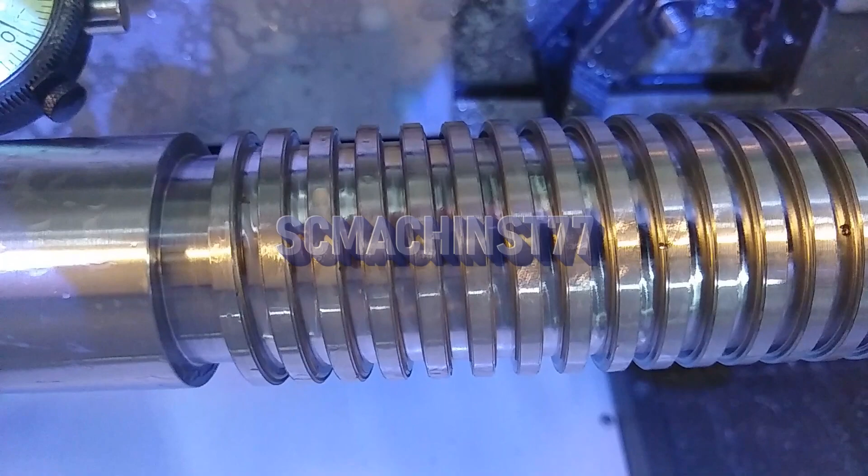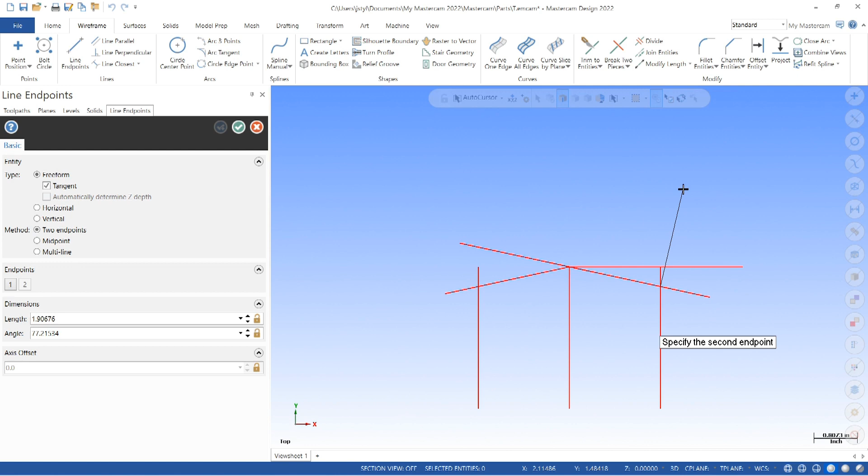Today I wanted to do a quick little video on using Mastercam to design a solid part and then creating an STL or a 3D print file and making a part that way. Just kind of going through it real quick. I'm not doing any explanations on what I'm doing, so if you want me to do some videos on creating geometry and stuff like that, we can do that later on down the road.

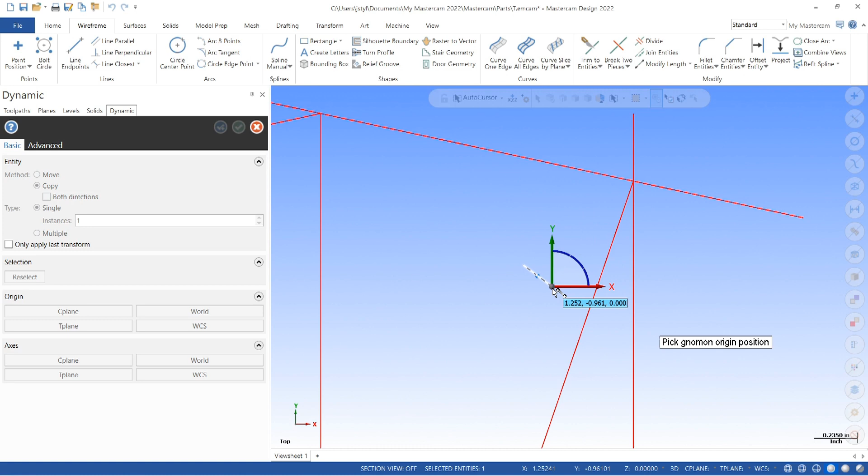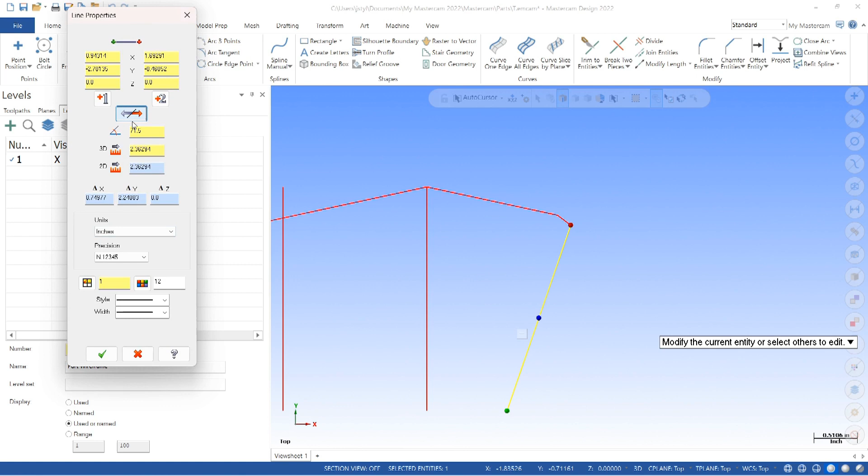But what I'm doing is I'm creating just a little piece that'll hold an indicator, so I can double check and see how square this build plate is on my 3D printer that I recently bought. I bought an Anycubic Kobra Max, 400 by 400 millimeter build plate, and it went together pretty good. I've done a few test prints. They turned out pretty good.

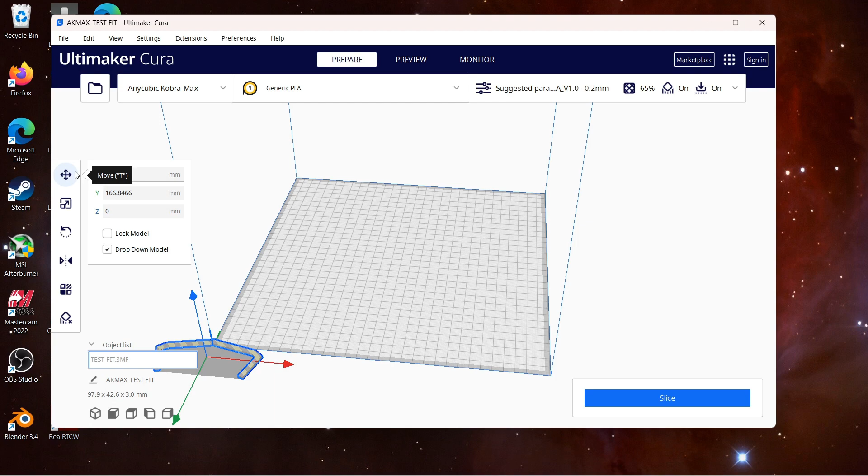So what I'm doing now is I'm creating just a test piece so that I can quickly print it out and then see how it fits over that fan shroud. I'm going to use Cura to slice it out. And here I'm printing my first little test piece.

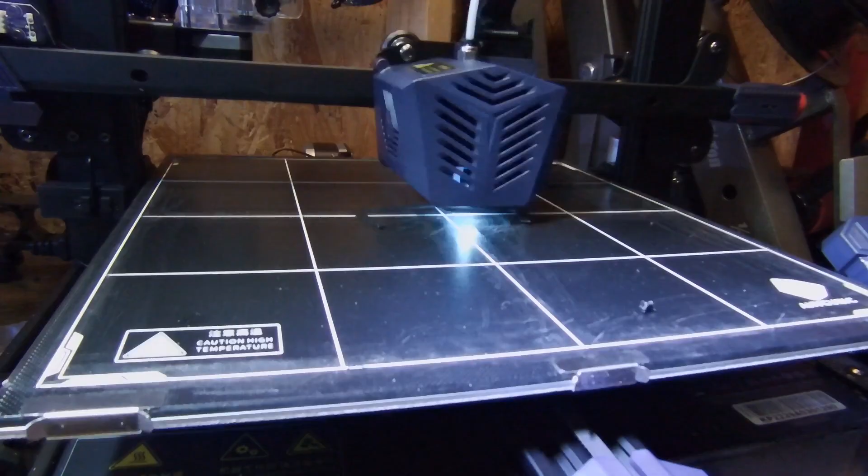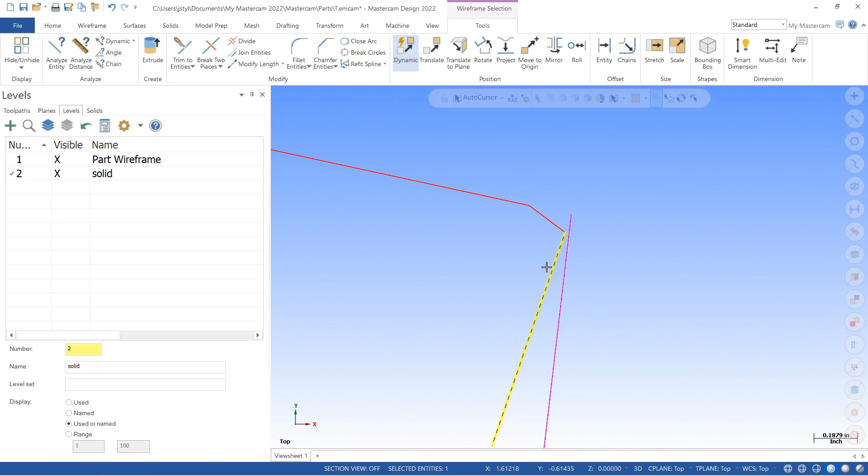It doesn't fit because when I drew it up, I drew the angle less than 90 degrees. It's supposed to be 96, and I knew it was 6 degrees off of that top flat there, but I did it less than 90 instead of 96 degrees. That's why I always do test prints when I'm checking fits on things first.

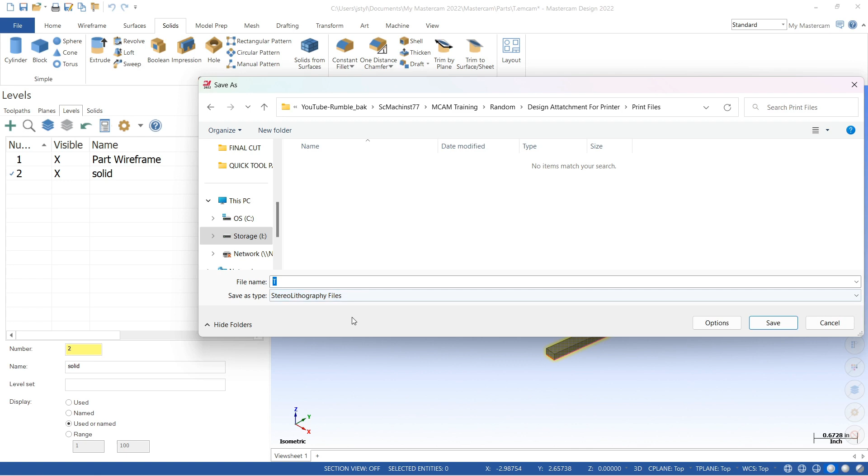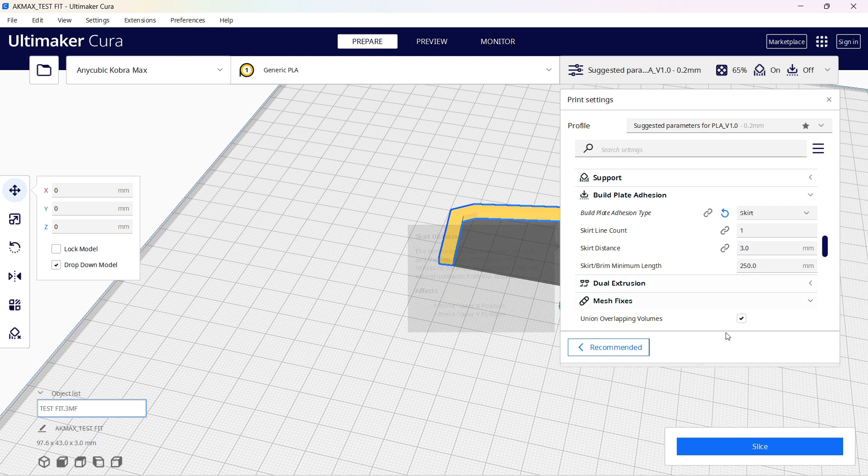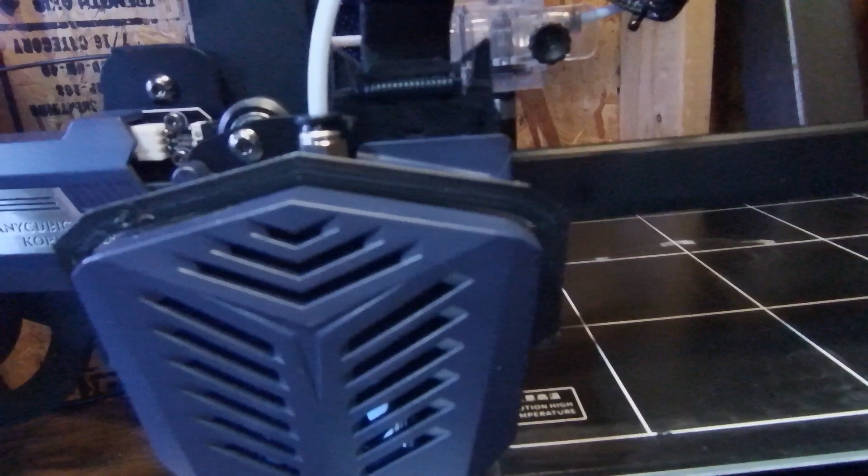Now I've got that done, I'm going to print another little test piece and see how it fits. This time it fits pretty good.

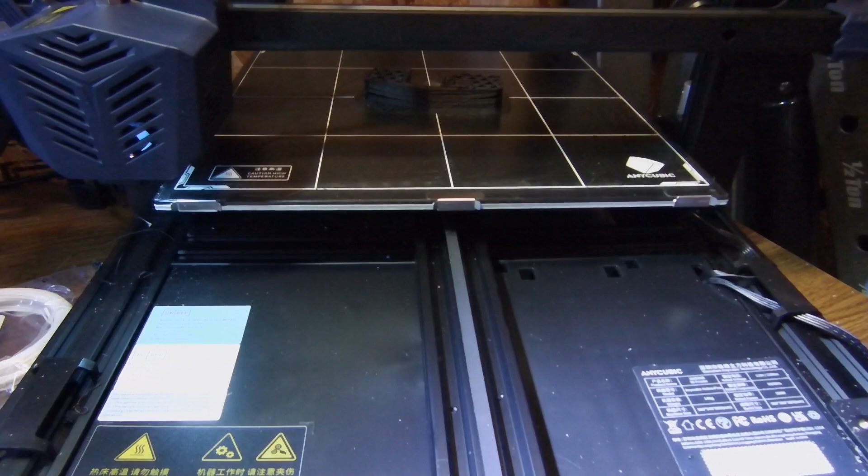Here I'm printing. I didn't show it where I had finished modeling it out, but I'm printing my first run at it. What I didn't realize is that I didn't pay attention to the spool I had on there, and it was ABS. I had done a test print with ABS when I first got this thing. I was thinking about doing one and put it on there. And trying to print ABS with PLA settings doesn't work out too well, as you'll see. Didn't print very well at all.

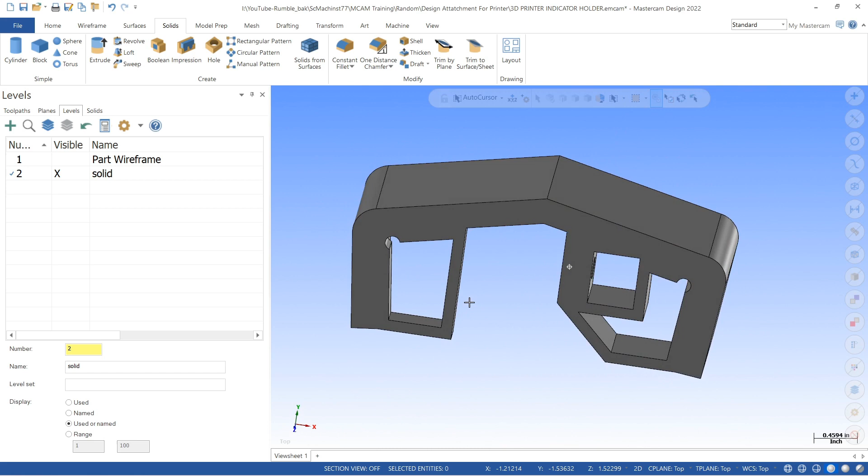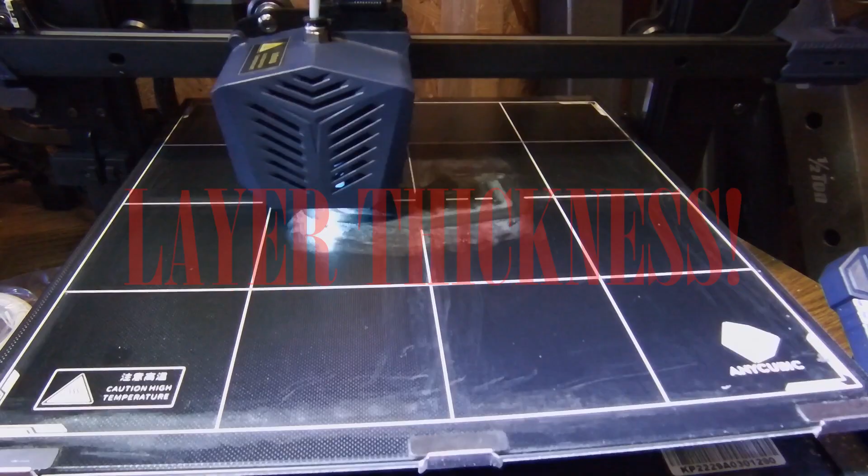So here's what I ended up finally with. I went in and reduced some of the volume of it so it wouldn't take quite as long to print. I think this ended up taking 2 hours, 2.5 hours, something like that. I could have bumped up the steps and been at like 0.3, but I went ahead and did it at 0.2.

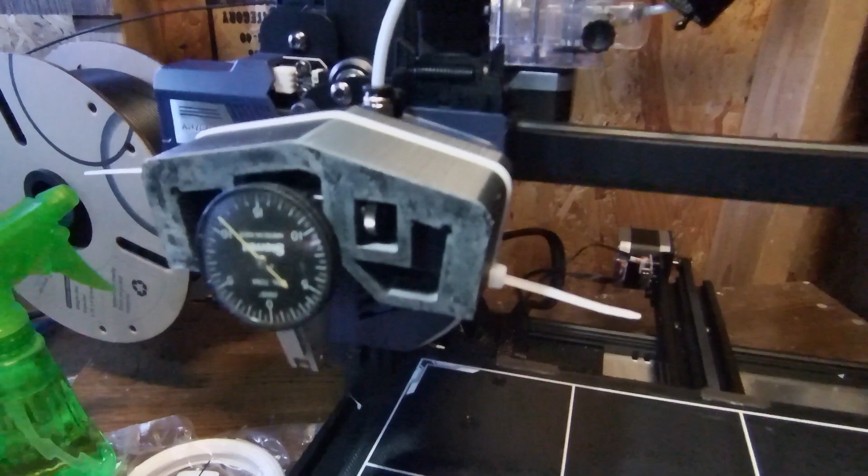Alright, and here's the indicator mounted on it, and it fit a little looser than what I wanted, so I put zip ties on it. And basically what I'm going to do, you'll see in the next couple clips, is I'm going to indicate in each direction and see how out of square this whole frame is. It wasn't too bad.

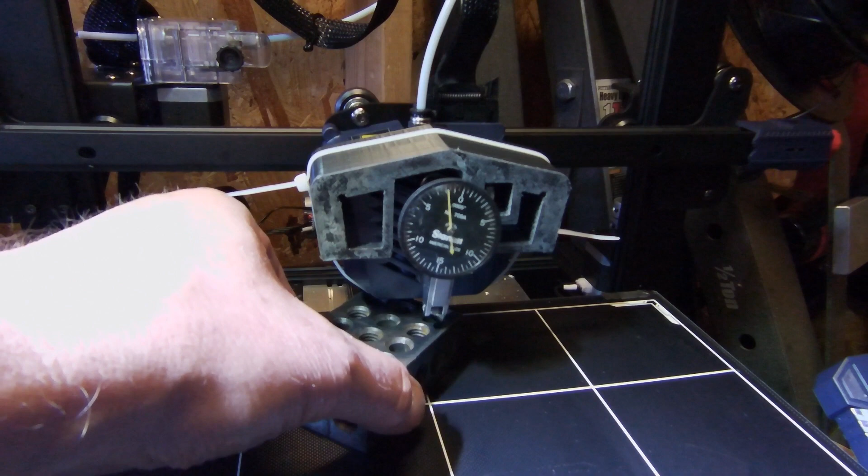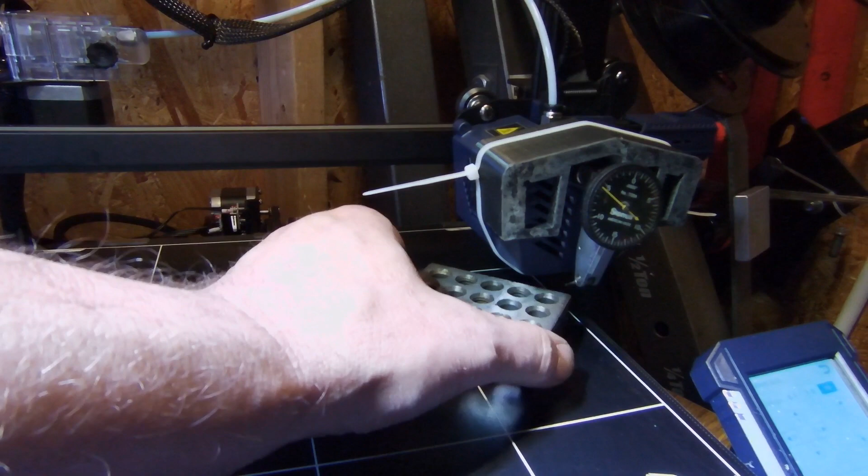I've got 6 thousandths right here, and that's on the very back of the build plate. About half a thousandth there. And then from side to side, this side over here is the worst side. It's about 10, but that still should be enough for the auto leveling to take care of. If it ends up being a problem, I can go in and shim things around.